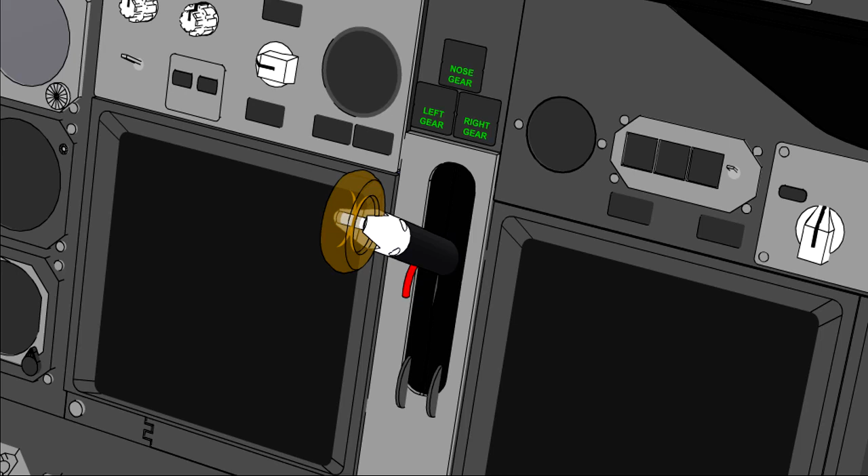In this lesson, we will look at the indicating systems used to keep the crew informed of the position of the landing gear. We will then look at a typical hydraulically operated landing gear extension and retraction sequence.

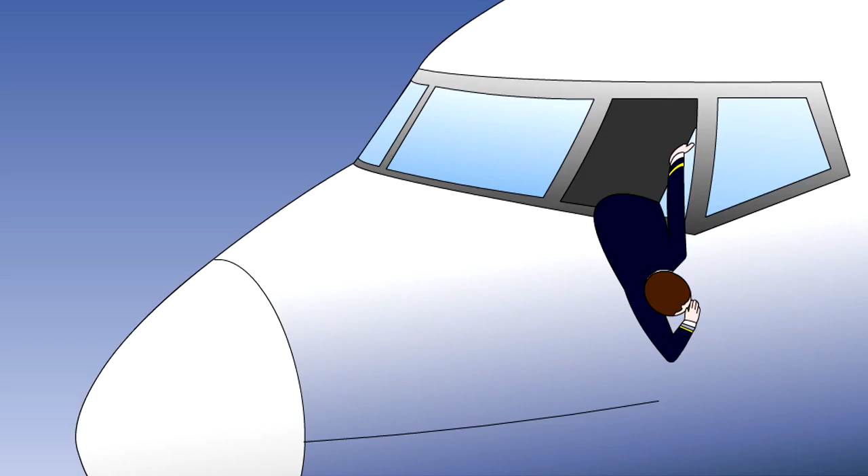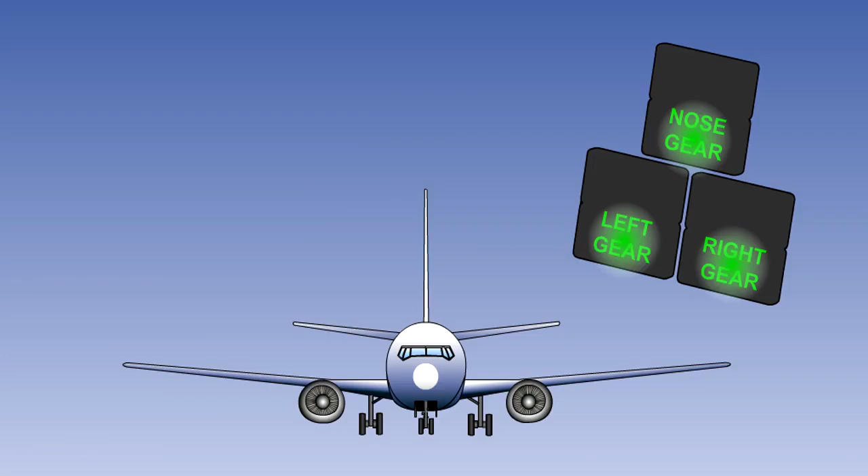Although the landing gear, when selected down, may be at least partially visible from the crew compartment, it is not usually possible to be certain, by looking at it, that each landing gear is securely locked down. An electrical indicating system is used to provide a positive indication to the crew of the operation of the locks and the position of the landing gear.

The system usually consists of microswitches or proximity sensors monitoring the up and down locks. These make or break electrical circuits when the locks operate, causing indications to change on the landing gear position indicator on the instrument panel.

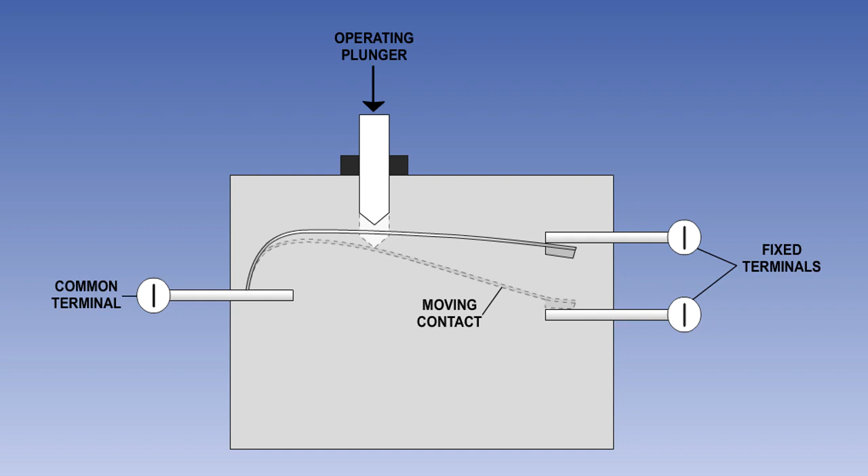Microswitches are simple, mechanically operated electrical switches, which are operated by a striker plate when the gear reaches the required position.

Most modern aircraft now use proximity switches. These are electronic devices with no moving parts. Each proximity switch consists of two components, a sensor and a target. When the sensor and target are in close proximity, a switch will be made.

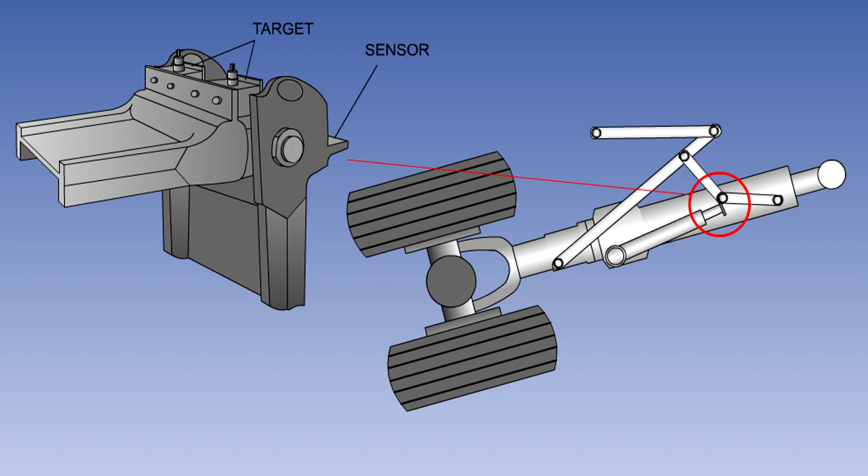The picture shows the proximity sensors on a gear-down geometric lock. When the jury struts move to the over-center position, the sensor and the target move into close proximity, and a gear locked down signal is sent.

The sensors are usually duplicated for safety reasons. Microswitches and proximity sensors are fully explained in the electrical systems lessons.

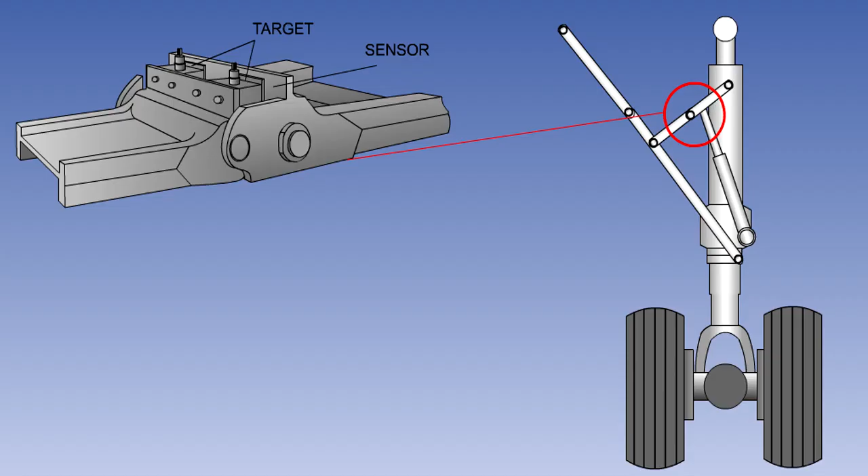Mechanical indicators may also be provided to show that the landing gear is down and locked if the electrical indicating system fails. For the main gear, these are often just buttons which pop up on the top of the wing when the gear is locked down.

They can usually be viewed from the fuselage windows. The nose gear will often have some sort of periscopic viewer in the cockpit floor through which the downlock can be seen. Some aircraft don't have mechanical indicators; instead, they have duplicated electrical downlock sensors.

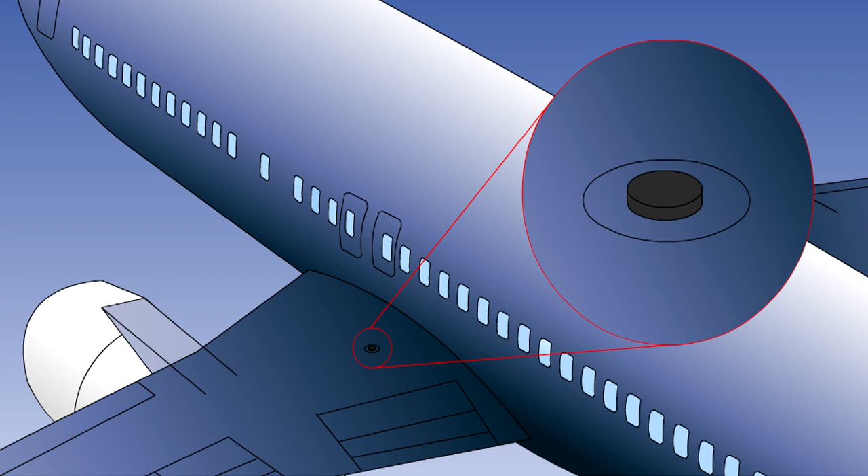On most modern aircraft, the electrical landing gear indicating system operates in such a manner that a green light is displayed for each gear when it is locked down. A red light is displayed when the gear is not locked in the selected position, and no lights are visible when the gear is up and locked.

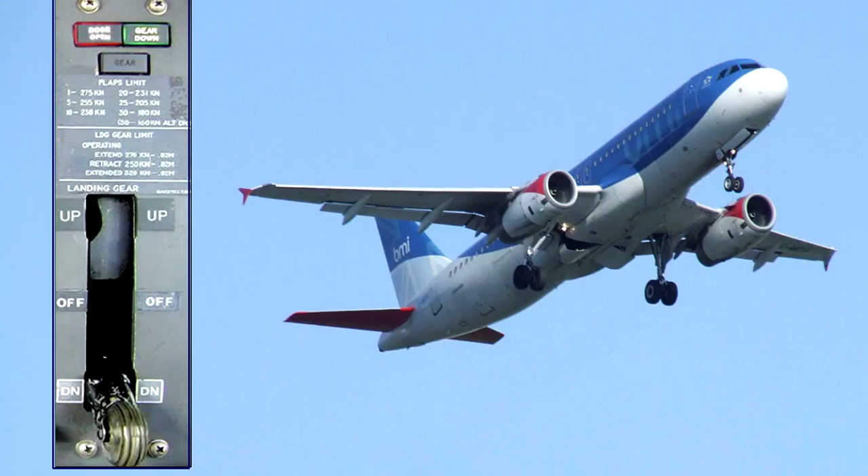Bulbs are usually duplicated to avoid the possibility of false indications as a result of filament failures. Many large aircraft also have main gear door lock indicators to indicate that the hydraulically operated doors are closed and locked. These lights may be red or amber.

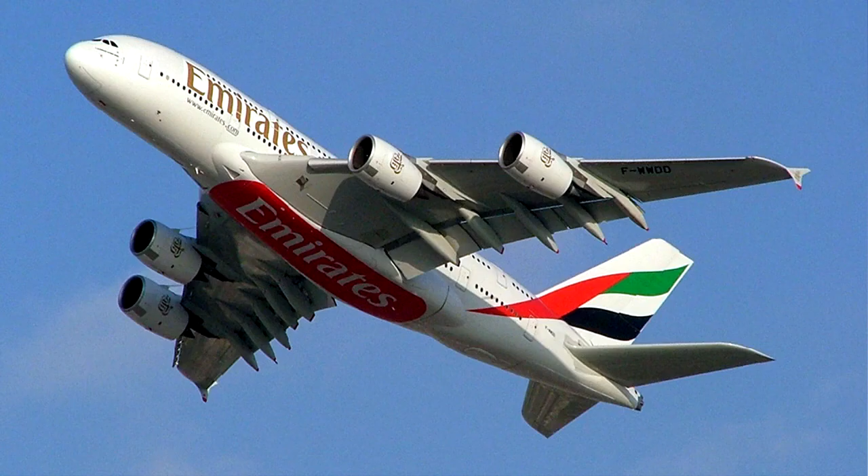Landing gear retraction systems can be hydraulic, electrical, or pneumatic in their operation. Here we will explain the operation of a hydraulically operated system. Pneumatically and electrically operated systems function in a similar fashion.

Most modern commercial aircraft have hydraulically powered landing gear systems. The hydraulic power is normally supplied by the engine-driven pumps. There will be a backup system available in case of pump or engine failure.

On some light aircraft, a self-contained power pack is used. This houses a reservoir and selector valves for the landing gear and flap systems. An electrically driven pump may also be included, or the system may be powered by engine-driven pumps.

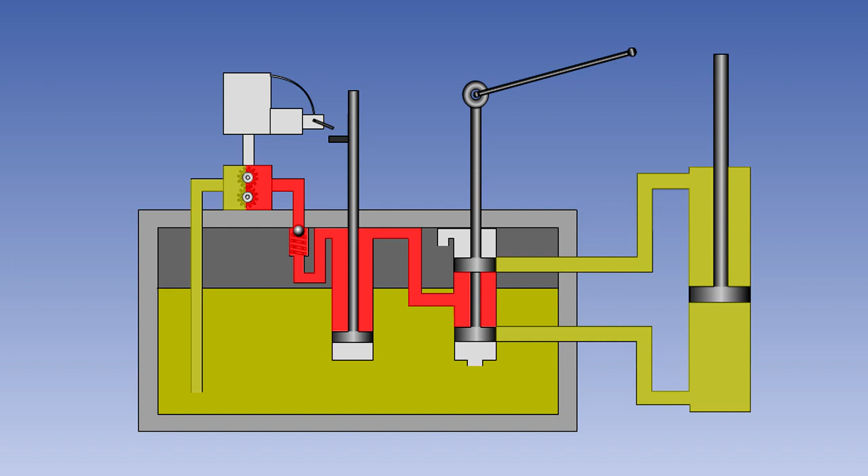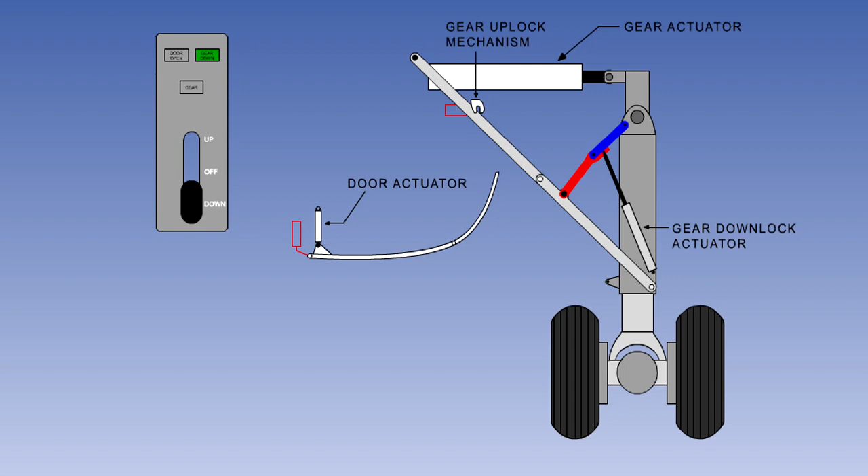The gear actuator and door actuator are double-acting unbalanced actuators. The gear downlock and uplock actuators are spring-applied and hydraulically released. The gear is locked down by a geometric lock mechanism. There are two sequence valves controlling the sequence of gear and door operation.

The two hydraulic lines from the selector are known as the up line and the down line. The up line is pressurized when the gear is selected up, and the down line is used for return fluid. The roles are reversed when the gear is selected down.

The door is hydraulically opened and closed. It is closed when the gear is locked up or down. It opens to allow the gear to raise or lower.

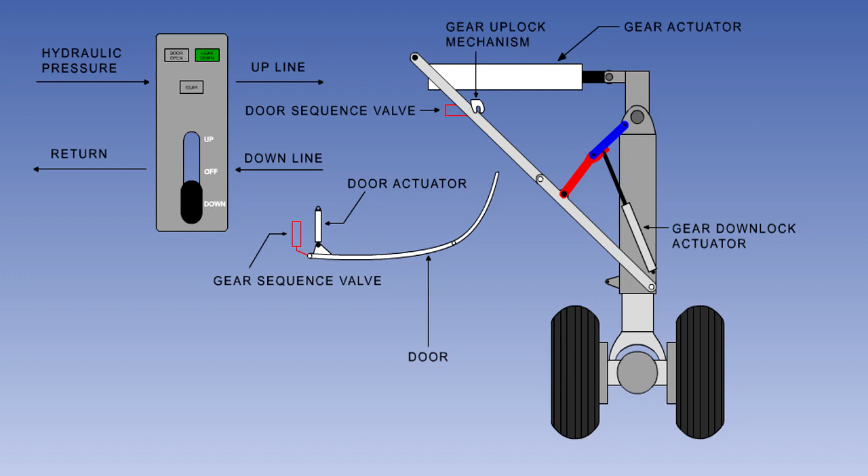We will now look at the sequence of gear and door operation and the associated lights indications that you can usually expect to see on a modern airliner. For simplicity, we have only shown one main gear. However, the other main gear and the nose gear operate in the same manner.

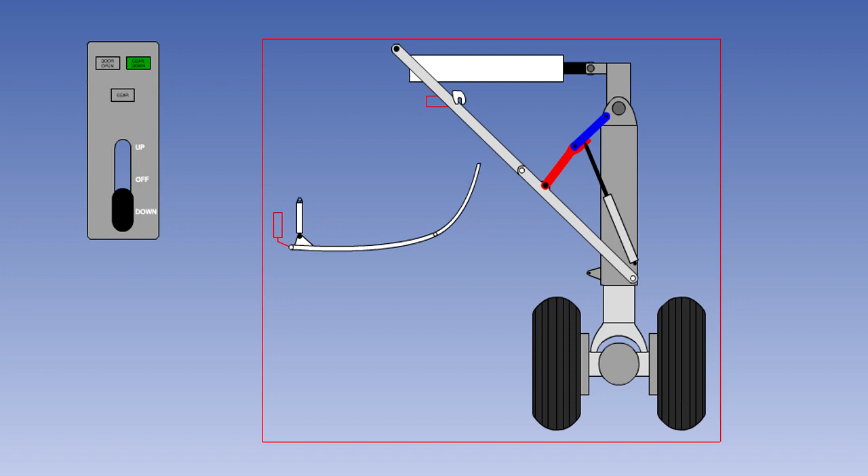The gear lever will be within easy reach of both pilots, and the gear indicator lights are usually adjacent to it. The lights indicate the status of each individual gear. For simplicity, we will only show the lights for one gear when looking at the gear sequence.

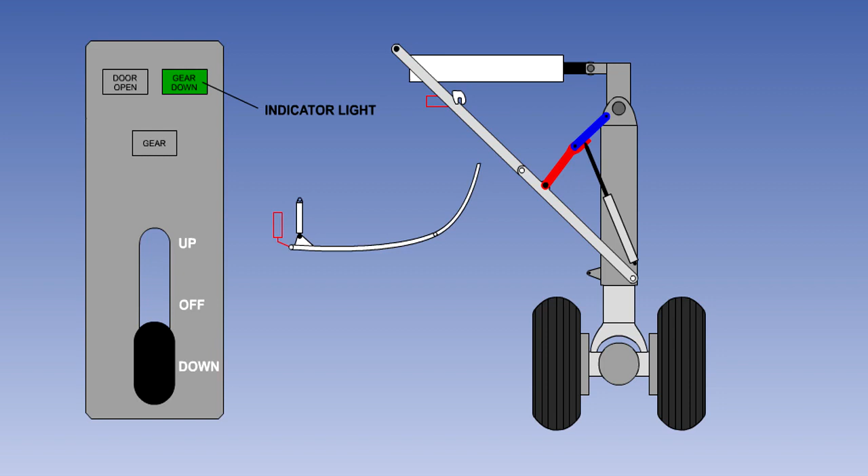With the gear lever in the down position and the gear locked down, and the hydraulically operated doors closed, the green gear down light will be on and the door open light will be out.

The gear red light is a disagreement light. It illuminates any time the gear and the lever are in disagreement. So when the gear is selected up, the first thing that happens is the gear red light illuminates. However, the gear is still locked down, so the green gear down light remains.

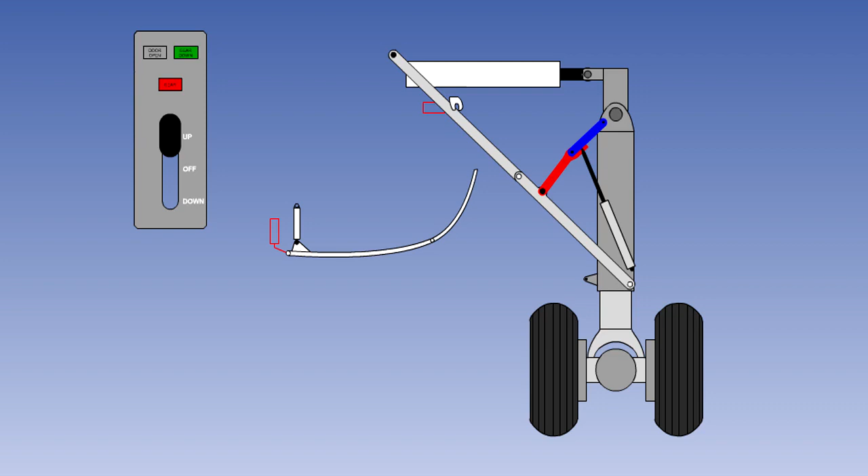The selector valve controlled by the gear lever will send pressure fluid to the door actuator. The door now begins to open and the door open light illuminates.

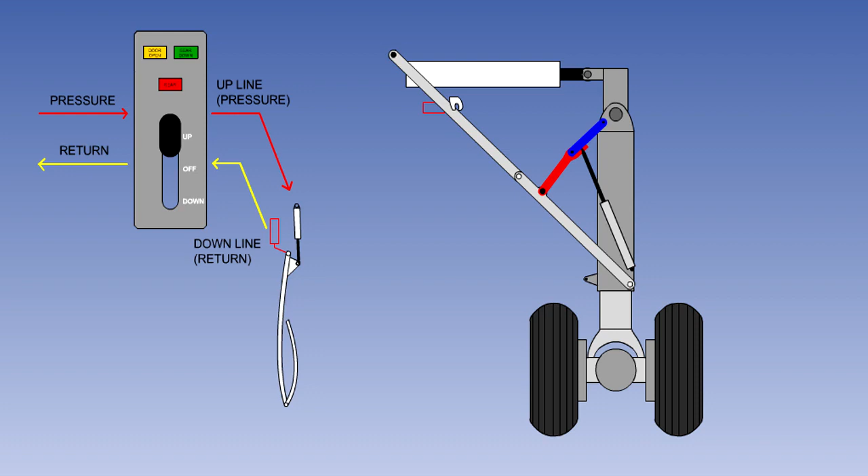When the door is fully open, its gear sequence valve will redirect the pressure fluid to the gear downlock actuator and the gear actuator. The pressure fluid passes through the one-way restrictor valve in the full flow direction. The downlock actuator will begin to retract, breaking the geometric lock. The gear is now unlocked, so its green gear down light will go out.

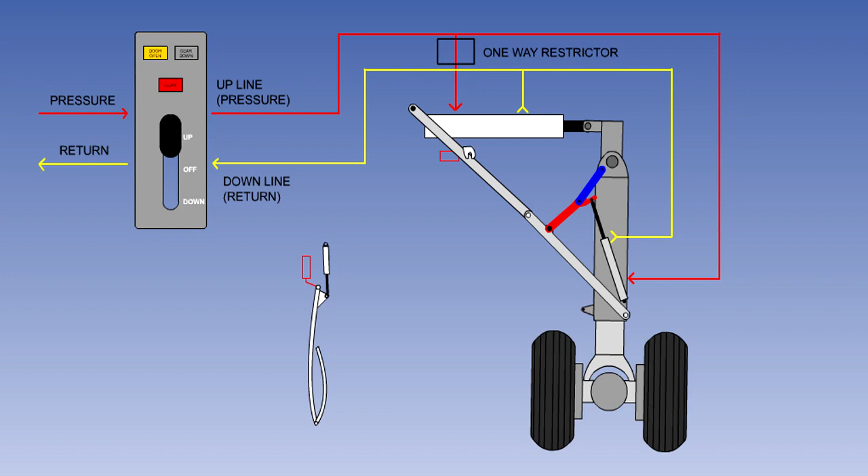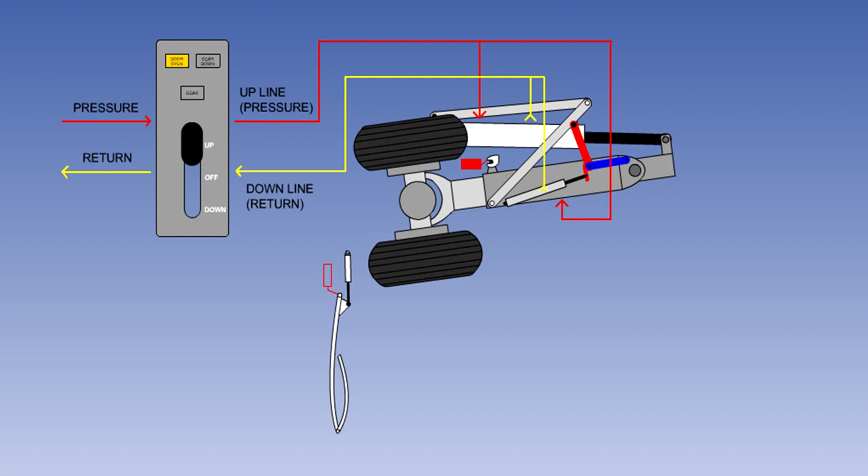The gear actuator can now raise the gear. When the gear is fully up, the uplock roller will engage with the uplock hook, causing, with spring assistance, the hook to rotate, locking the gear up. Once the gear is locked up, the red gear light will go out.

The door sequence valve now directs the hydraulic fluid to the door actuator, and the door closes. Once it is fully closed, the amber door open light will go out. With the gear up and doors closed, there will be no lights on the indicator.

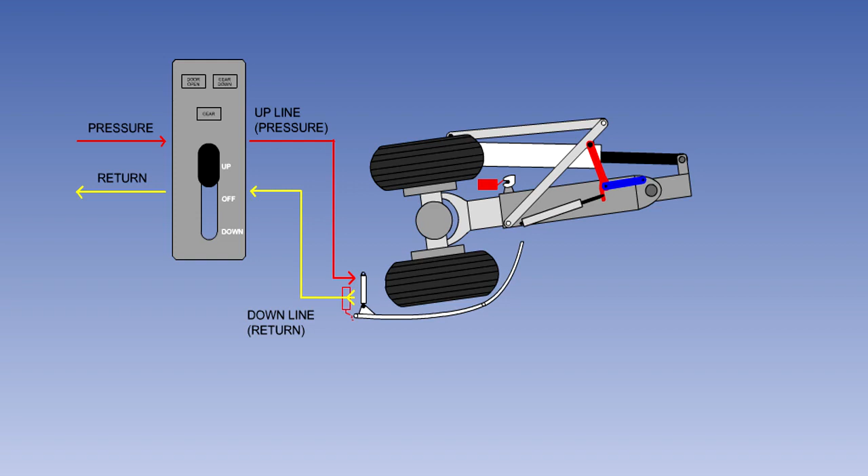Once the gear is up and locked, and the door is closed, the gear lever is placed to the off position, leaving the gear unpressurized for the period of the cruise, so extending the life of the landing gear components and preventing unwanted leakage of hydraulic fluid.

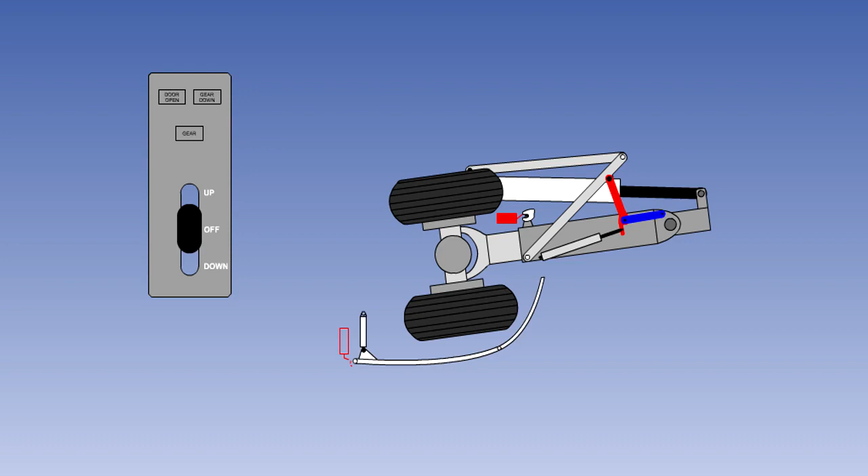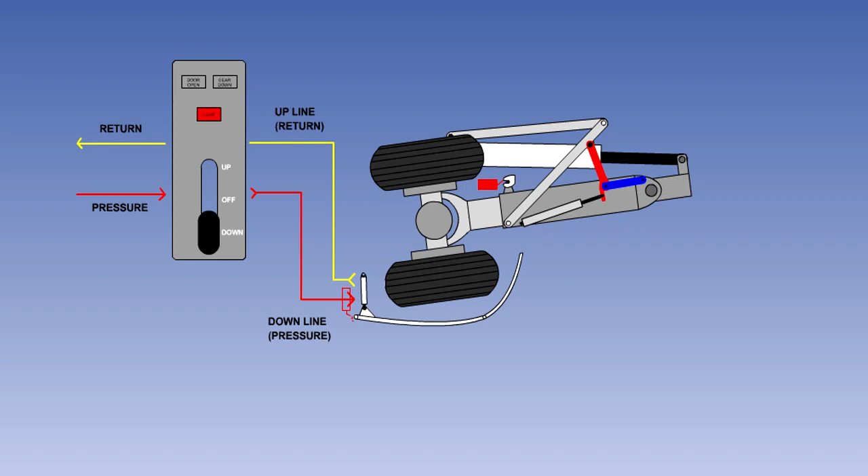The sequence when the gear is selected down is basically the up sequence in reverse. When the lever is selected down, the red gear light comes on to indicate a disagreement between the lever and the gear. At the same time, fluid is directed to the door actuator. The door will open and the door light will come on.

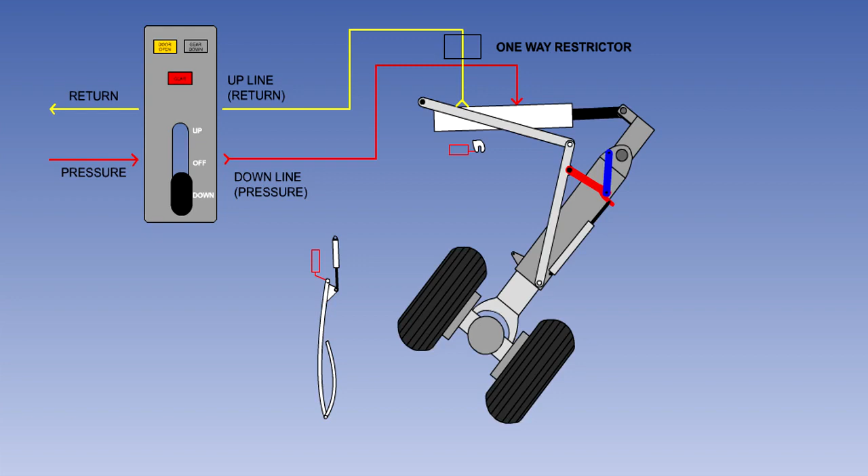When the door is fully open, the gear sequence valve will redirect the hydraulic fluid to the gear up-lock actuator and the gear actuator. The up-lock mechanism will rotate, releasing the gear. The gear actuator will now lower the gear, assisted by the weight of the gear.

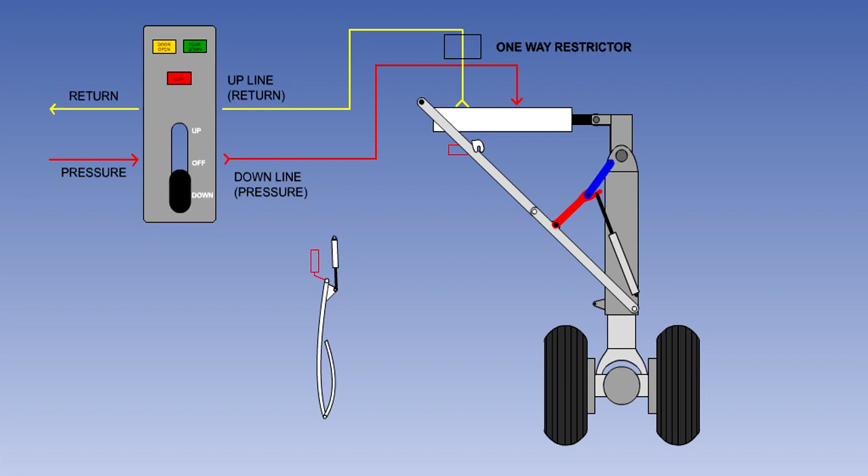Cavitation is not a good thing. It is fully explained in the hydraulic systems lessons.

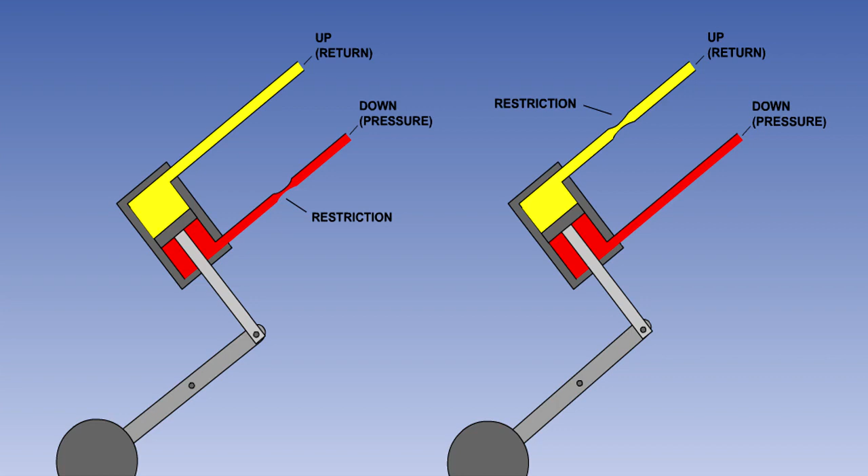When the gear approaches the fully down position, a powerful spring in the lockdown actuator will push the geometric lock over center, locking the gear down. The red gear light goes out and the green light comes on.